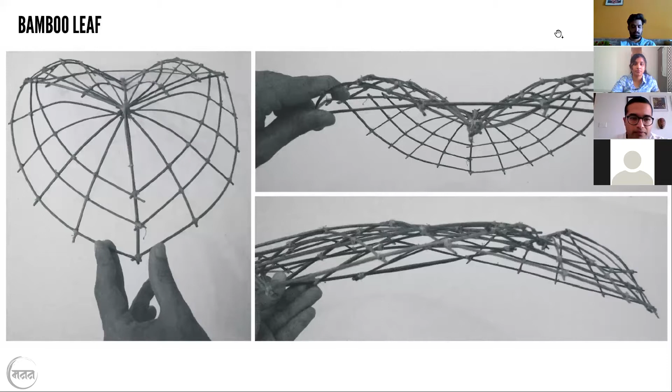And then the thought was about how one could use something like bamboo, which is a building material that is extremely sustainable, and reconstruct this leaf in the form of a freestanding pavilion-like space. We exhibited this at the Shanghai Expo, and it was part of a bamboo pavilion. So the idea was, how do you build a lightweight structure derived from nature, derived from the form of the leaf - and this was in China.

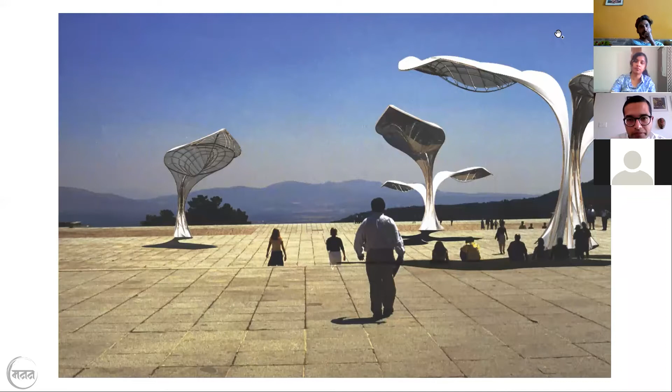So we showed how, in large public places, these could just be installed as very lightweight structures - it's just fabric and bamboo derived from the form of the leaf.

A couple of years after this, I was involved with the CIDCO Exhibition Center, and so one sees the learnings from that, in terms of structure and skin being not very different from each other.

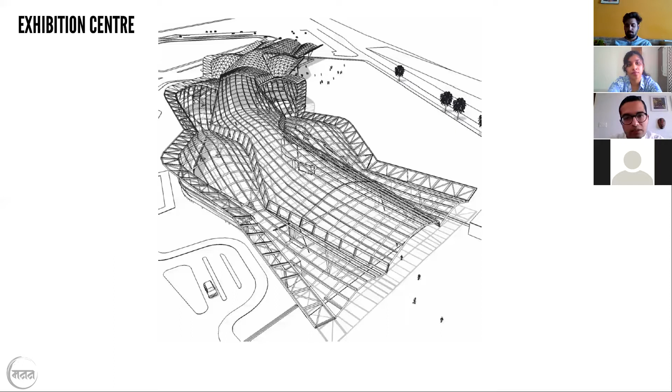In this building, this is a model of literally how the structure is. You will not see any trusses hanging below, you will not see anything below the skin of the roof. It's just one thing, and we could not have done this without that model that was done so many years back.

Which gave an insight into how structure might work. Of course, many of you must be familiar with the CIDCO Exhibition Center building, and so everything you see here is actually structural, including the inclined end truss, the arches, and even the skylights, in fact, are structural. It's an inclined truss which actually spans between these sets of columns.

So nature as a giver of form is an idea that we look at pursuing in various ways, seeing how nature is really an inexhaustible source of inspiration. I don't think we've even scratched the surface as far as architects to know how much is possible.

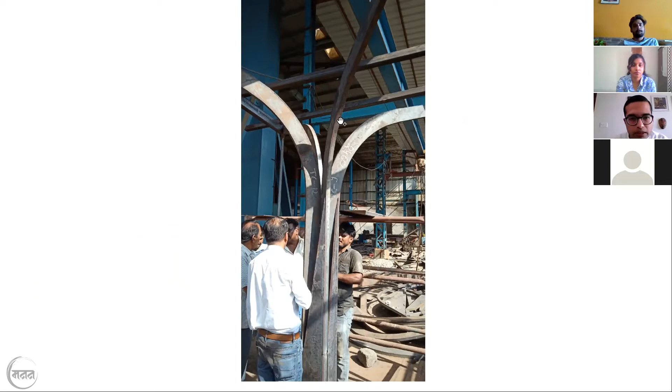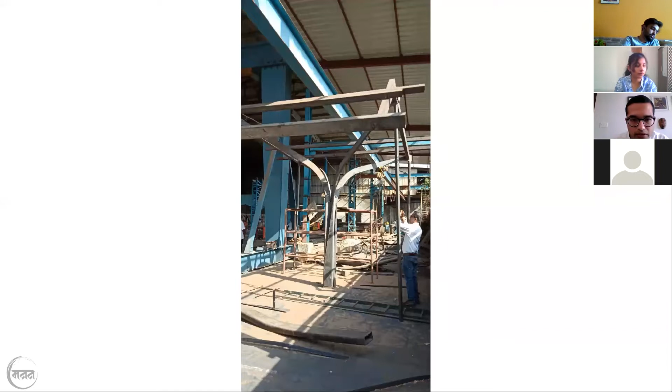So yeah, a full scale mock-up in the workshop, and then we brought it to site, and it was erected very fast on the site. So this is then finally how it looks, and the branch is holding up the roof, and here it is finally with some other trees around. The tree staircase stands and finds its place there.

Of course, there's more to the building — there's interior space, but I think that as far as this first theme of form from nature, the idea is that we can actually look at nature, understand and abstract those forms holistically, not just aesthetically, through structure, through all the possibilities that exist within that form.

Moving people and moving buildings. So this set of projects actually, for some people it may not seem like architecture, but it actually comes from the understanding that we as architects have of the city, and what we need to contribute in terms of understanding of the city.

This is a project called the Walkabike. So the bicycle is one of the best machines ever invented, and it's extremely efficient, extremely elegant. The bicycle works as part of the larger transportation systems that exist.

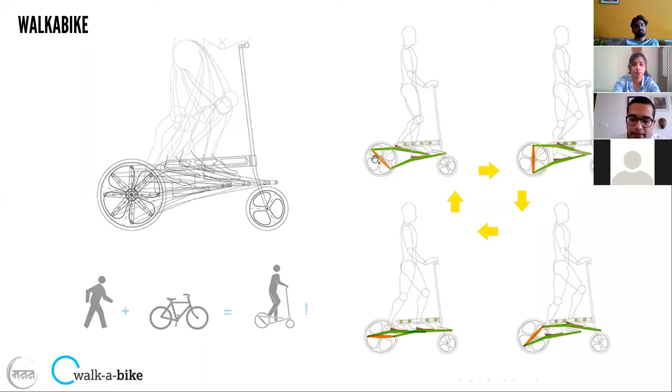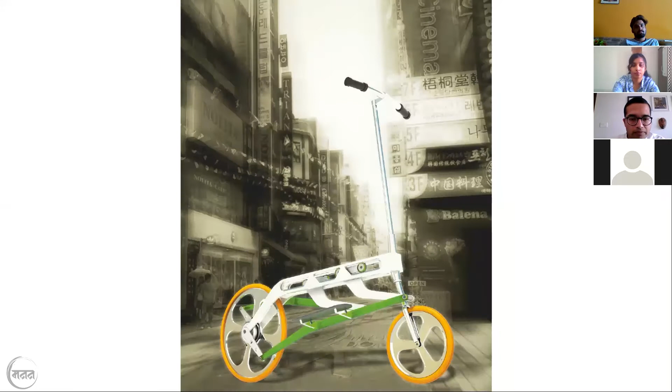Instead of sitting on a bicycle, you could walk. So we looked at elliptical motion rather than the circular motion of a bicycle. We call this the Walkabike, because you're literally walking, and it gives you mechanical advantage. This is finally how it was designed, how it would go across the city, and how it gets folded, with some details. These ideas came out of an understanding of the city and how, as architects, we need not remain confined to certain domains.

Building only means you don't just build buildings. There are so many more things that you can build, from moving people to moving buildings.

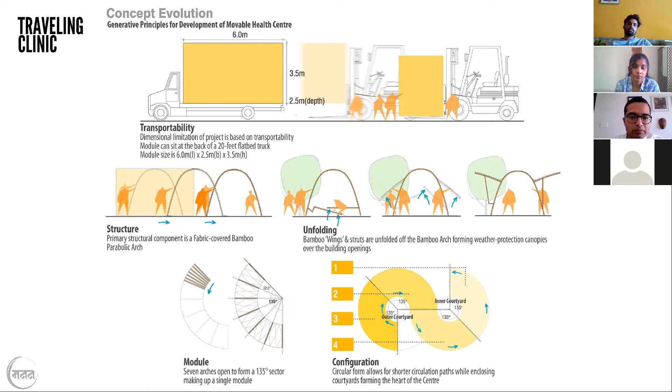This was a competition that we won, an international competition, for a traveling healthcare clinic. It was in Southeast Asia, and they wanted a clinic which you could pack up into the back of a truck and take away. The idea was using bamboo, the parabolic arch, and the stable frame, which could then be unfolded and assembled.

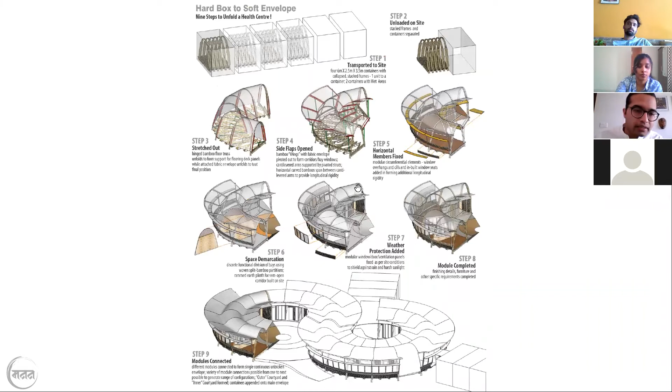So it comes in a box. You open the frames, you lay the frames out, and then you just open it up, literally unpacking a building. The use of bamboo, the use of fabric, the use of local material actually creates a clinic which would not be alien to a rural setting, but people would relate to it and feel part of it.

So there are actually two courtyards: one is the public courtyard, and one is the courtyard where the actual clinic would happen. So it actually wound its way around two courtyards.

We've been involved in a lot of smart city projects. You might have heard of the smart city urban renewal mission. We've done several cities, six cities at last count, where we've done plans for them. I just picked some projects out of them.

This is Kalyan railway station. One thing to understand is that the actual railway station and its premises are under the railways, whereas the precinct around the station is something the municipal corporation is involved with and is responsible for. So we were not on the station, we were outside the station.

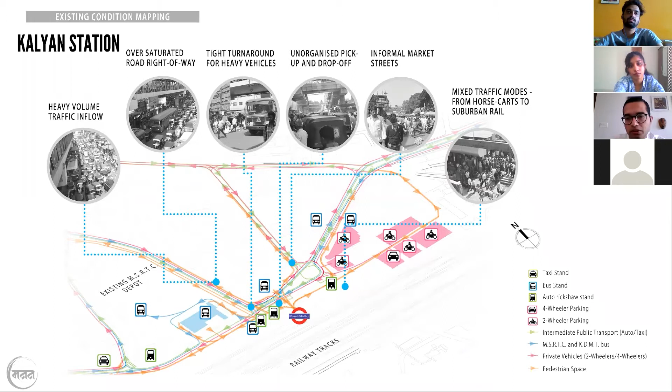So this started with the precinct. How do you develop a precinct around the railway station? We started by looking at mapping and understanding all the various movements, and like any railway station, you have multiple kinds of movements, multiple kinds of activities around.

After that, we said we need to segregate movement. Everyone cannot be managed at the same level - your autos, your taxis, Kalyan incidentally had tongas, and buses and private vehicles, two-wheelers, three-wheelers. So we created a multi-level deck, and we did something quite remarkable in this project: we made two government bodies talk to each other.

Usually government bodies never talk to each other. Kalyan Dombivli Municipal Corporation will never talk to the transport authority. We saw there was a bus depot here, and this was the largest patch of land available for anything - otherwise there's very little land. So we proposed that we'd elevate the existing bus depot, take it above, and use the base for parking and pedestrian amenities.

When you think of it, even though they're both government bodies, we weren't sure if they'd agree with each other. But this started off as an idea, we kept talking about it, and finally it's done. There's an MOU - memorandum of understanding - signed, where the bus depot will actually go up.

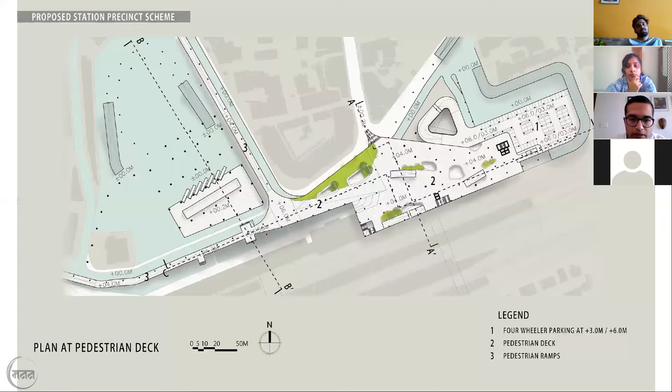So what we've ensured is that pedestrians move out at the same level. When you cross the bridge, you're moving across at the same level, creating much larger pedestrian-friendly areas around the station, putting the pedestrian and public transport first. These are some plans of the area, and this is the deck, which becomes the pedestrian deck. Usually areas like skywalks become very limited, because they're just conceived of as moving people from A to B.

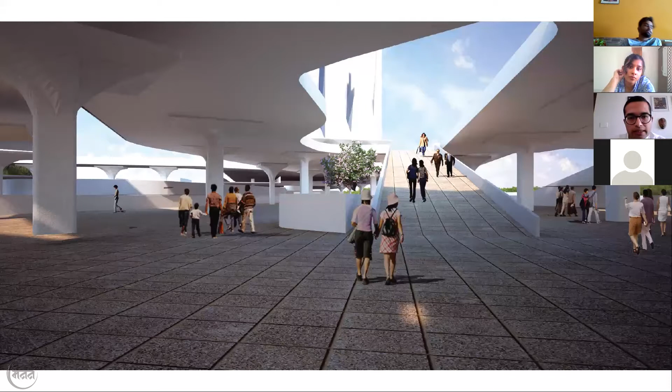At railway stations, there's so much more that has to be accommodated. So we looked at more generous decks, larger decks where hawking was allowed, where people are allowed to wait for auto rickshaws, and much more a sense of natural light coming down. They're not these dark, dingy spaces, but spaces where you're much more relaxed getting off a train.

This is actually under construction as a design build project, so all of these drawings go to the contractor, and they build based on those. This is a plot we opened up because we could optimize it, which the railways can build and sell to partially fund this project. We've also done Thane railway station.

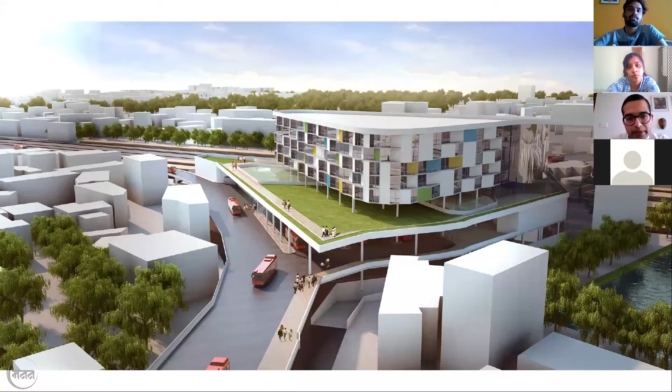In the interest of time, I won't go into this too much, but similar ideas of an elevated deck. This is Thane East. Thane West already has a station improvement scheme, looking at an elevated SATIS which comes in and segregates movement.

The third part is about the house. All architects love doing houses, and we are no different. The ideas about the house are that we look for houses that are not extravagant, not architecture for architecture's sake, but houses which actually engage with their context, which bring the context inside, and which connect to nature in a very simple, very primal manner.

This is called the Twin House, north of Bombay, and again a low budget house with a fixed budget we had to work within. It's a heavy rainfall area like all of Bombay, so we were looking at the sloping roof as an idea, doing it in RCC rather than in steel.

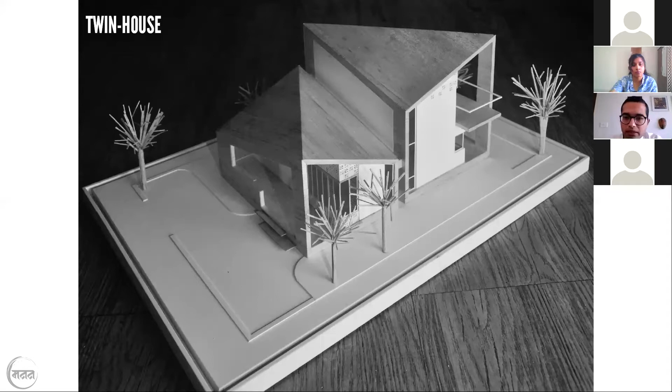So again, the idea that sometimes you reduce a concept to a very simple gesture - in this case, just that folded roof, and that was it. In fact, personally I think the walls are just incidental. The roof does everything.

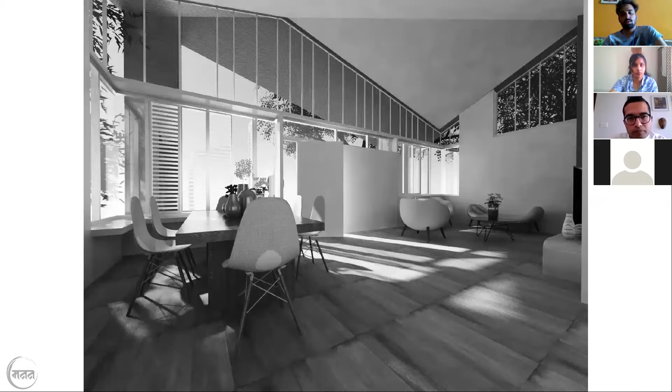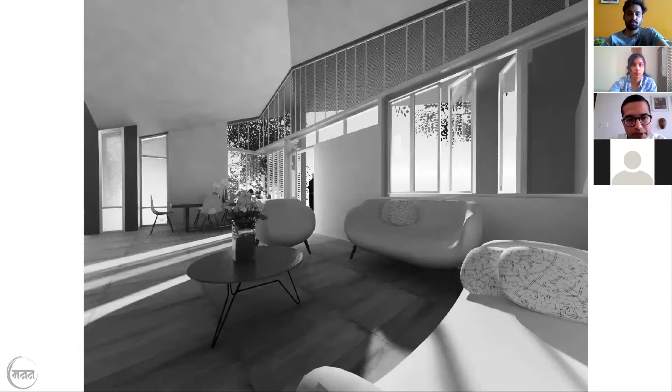It gives very open, very connected spaces which connect to the outside. Since none of this is structurally required, it's much lighter, and the house just opens up to the outside. This is actually part of a larger complex with many plots, and this was the first one which got built.

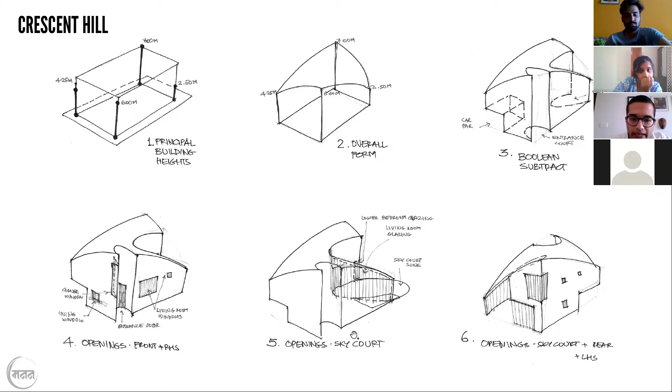The next 2 projects are in Bangalore, in a place called Nandi Hills, north of Bangalore. The project was called Crescent Hill, and here instead of the folded roof, we said let's bend the roof - one roof achieving different heights, but instead of a facet, it's just a sloping, curved roof. We picked 4 points and bent it across, so you had a greater height where you had a double story, then it stepped down, and we carved out areas for the entrance court on one side and the inner court on the other.

This is how it finally looks. Again, this is a form of house that keeps changing as you move across - the attitude towards the street, the attitude towards the courtyard - all of these change because of that gesture of the roof. It bends down towards the inner court, with a carved out court and stair which takes you to the bedroom above.

The next project is also in Nandi Hills, and both of these are larger developments. This is a module, and that house module repeats across the entire development. Some ideas related to the master plan address how, in a large development, you give everyone a sense of individuality and a sense of community.

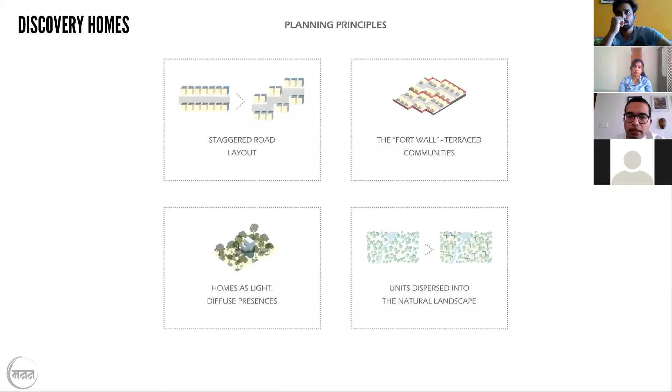Everyone goes to these hills and the first thing they say is, let us flatten it out, which is quite a ridiculous thing to do. So we actually looked at working along with the land, and that gave us our plan.

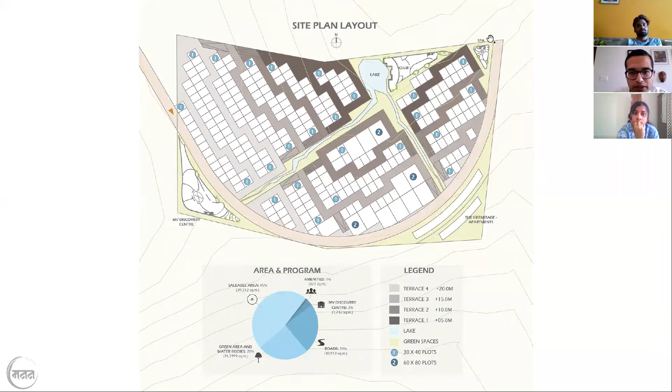We maintained the slopes and made the natural streams the main things around which the development is designed. All the streams are seasonal, and they collect into a small pond at the bottom, where we put the clubhouse and all the community facilities. The roads are staggered so that traffic moves slower, and the different shades of gray are actual terracing, stepping down from the upper level to the pond at the bottom.

Again, these are not very high budget houses, and they're modular. So we looked at very simple, light, and easy to build frames. The house becomes a fragmented, lighter, more delicate presence in the landscape, with its own sense of internal space and internal courtyards that the house looks onto. Within the module there were variations, so even though it's the same module, one house looks different from the other.

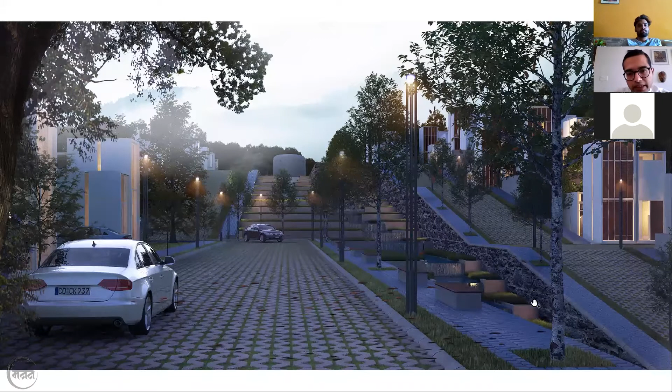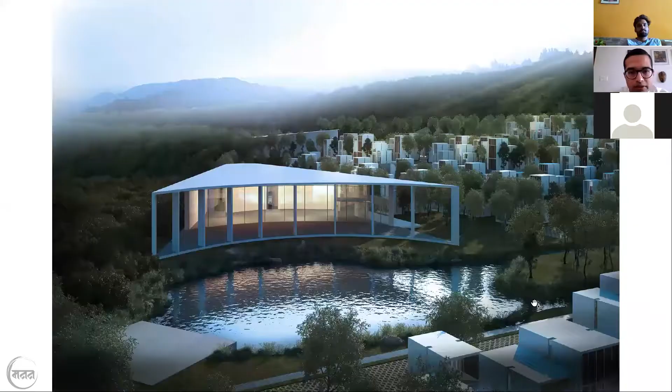The whole stepping down of the stream, which takes you all the way to the bottom, becomes the main feature that distinguishes this housing development and gives character to the space. Working along with the landscape and letting that dictate the kind of development we did was very important, and this is the lake at the bottom of the entire development.

From the individual house, we moved to collective living. This was a competition we won, which looked at how to have a house and a farm together. We took a module with 4 houses and let the roofs be green. Instead of one flat green roof, we created a terrain, almost like a man-made hill, becoming an interesting interconnected terrain where you could actually grow food on top.

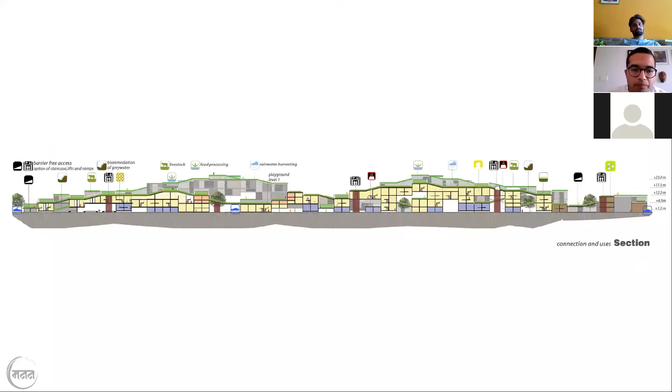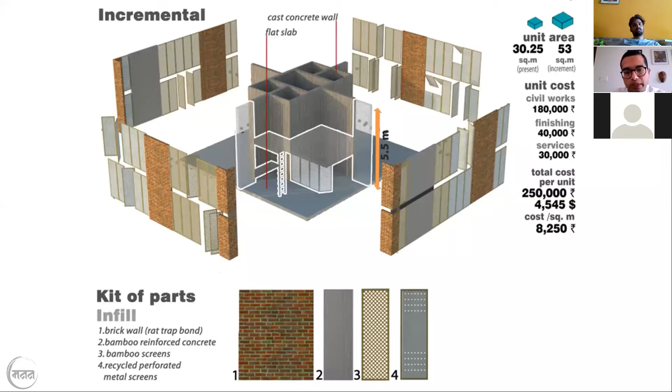This is, of course, an ideas competition, so we really had to push the ideas to their logical extreme—how does this entire roof get planted? We looked at the houses as just cores, like a different set, so you'd have the structure, and different skins could come in and finish the house. This is how it would look, with the whole undulating terrain on the roofscape, and a lot of light coming downstairs.

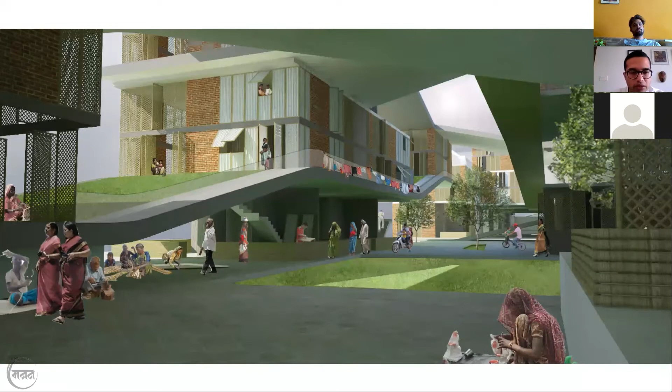Even though this competition wasn't intended for building, competitions do a couple of things. Within the office, they help build a lot of skill—people are able to work very fast and at high levels of quality. They also seed ideas which lead to other live projects in the market. The entire development looks almost like an undulating hill.

Another winning competition, this time in Mumbai, was by a builders' lobby group looking at rental housing. It was low cost, but low cost doesn't mean substandard. We looked at ways to get accessible green space for everyone in such a dense development. We split the building into 2, and midway we placed a garden, so no one is more than 4 or 5 stories away from walking down to a garden. The building was porous, so light and ventilation penetrate through.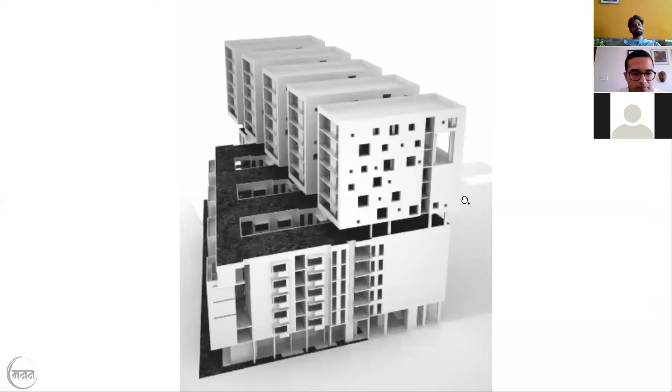This idea led us to a project in Bangalore, a large 12-acre development, which I'll quickly run through. We looked at each building designed according to orientation, considering climate. Circulation space—the movement space within the building—isn't just corridors and staircases, it's space where people come together, so that was given a lot of importance.

Angling, if you look at this drawing, means angling houses away from each other, so no one is staring across at a house opposite—instead they look away, giving a certain sense of privacy. Every house has at least 3 sides open, and everyone has a little bit of green, a little planter bed.

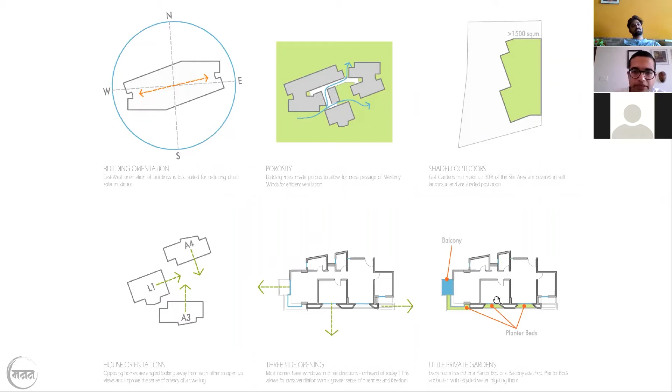This carries over from the rental housing competition, which is a second ground at an upper level that connects all these buildings together and becomes that connecting terrain and social space. This is the larger development where the entire green is open to the road, so it's not inside and enclosed, but much more open and public.

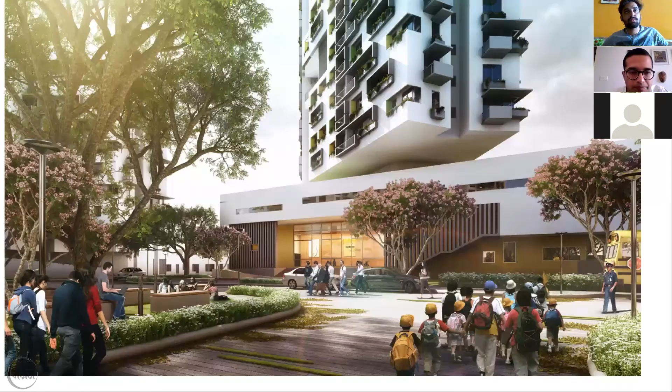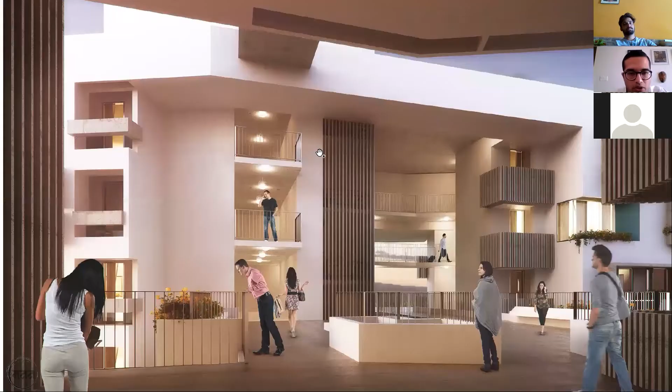This is currently under construction. A couple of other things: the alternate floors are staggered, so everyone doesn't have the same configuration. Everyone has a little bit of garden in the form of a planter bed. And this is the 4-story connecting bit that goes across and becomes this large connecting public space at an upper level.

You see the staircases, so that these become live active spaces and not just dead corridors or dead staircases. This staircase actually cantilevers out from here, with a little bench so you can sit down and look down onto this area. There's railings which are coming up.

These are the large verandas. So instead of looking at corridors, we looked at almost verandas where people can come out and look down onto the green below.

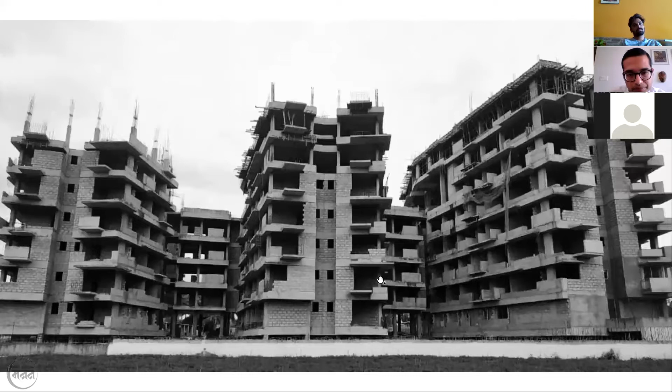This is the connecting 4th story. These are still to go up, and you see the alternating balconies. The planter beds are just getting done, and again the verandas looking down with the staircase on one side.

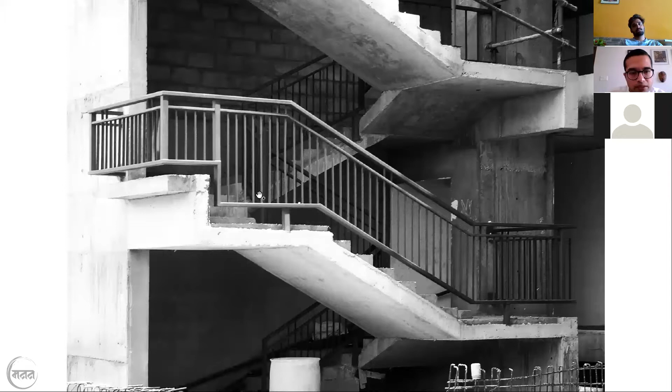Some details on how the staircase railing is supported here and here—it's almost like a beam which goes across this entire length. Balconies plus planter beds are integrated, so you can sit right here and have a planter bed right outside your window.

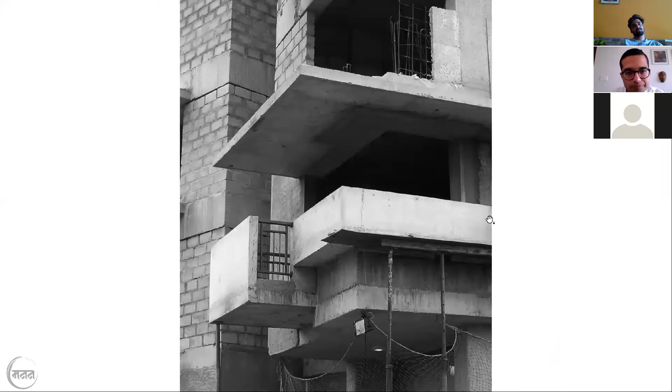So the next part is about the scale of ideas. Do ideas have scale? Is there something too big to be suited for ideas, or something too small? The next two projects will talk about that.

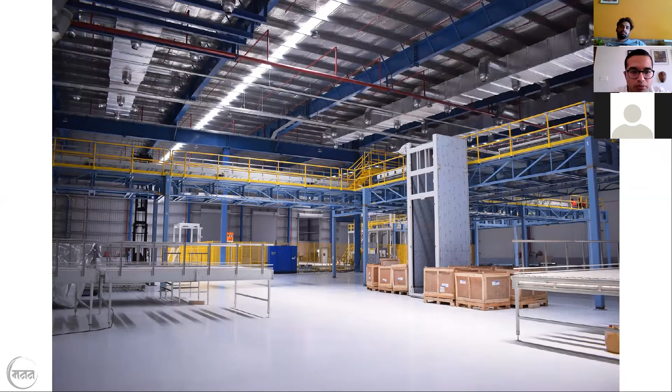So even in such projects—though to a much lesser degree, since these are highly process-driven—there is still room for an idea, room to push certain ideas. And this is the roof.

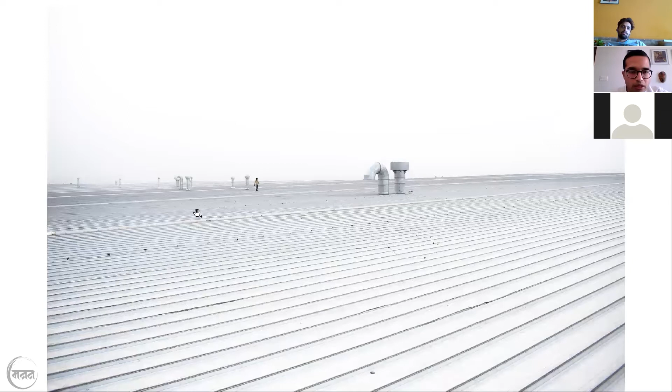This was for an engineering practice, the structural engineers. So we actually looked at ways in which the practice of a structural engineer, which involves understanding of structure and material, how can that be reflected in the space that they're working with?

It's a very small space, this is in Thane. We actually referenced a lot of structural concepts in this. It was a higher story height, so we didn't put any AC ducts across the space - we just kept the AC ducts at two ends, and the main studio space was blown up.

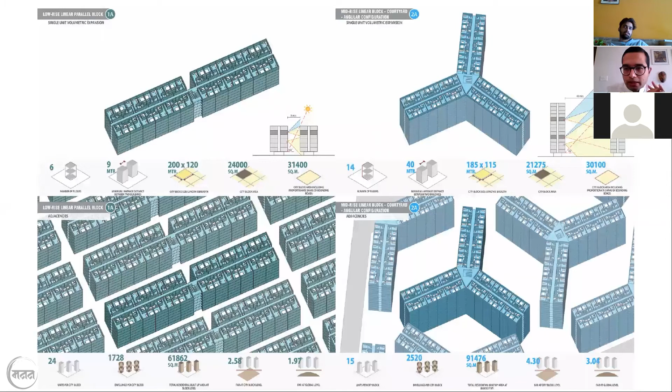So we just modeled various typologies of buildings, whether it's a linear typology, a triangular form, courtyard building typology, or point towers. The whole idea was to see - we have very random ways of deciding FSI at very global levels, it will just be decided, okay, a global FSI is 3 or FSI is 4. Do we know whether the buildings and the plots can actually support those kinds of densities in terms of just ensuring a reasonable quality of living environment?

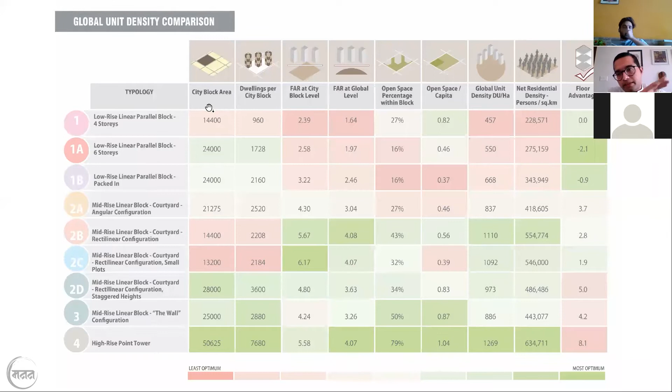We tested this across, and finally we did an evaluation of the various typologies - you see the typologies lined up here, and then the metrics. How do these metrics line up? Of course this is much more, I'm just going at a very high level over this, but this is one idea of building the idea of the city.

The other is looking at city centers. So we've been looking at city centers, and we looked at Bangalore as a city, and how one can reimagine the center of the city. So we went and pulled up old maps of the city and understood how the city really developed over time. Bangalore is India's fastest growing city, but it was never really designed, never really conceived of as a commercial center.

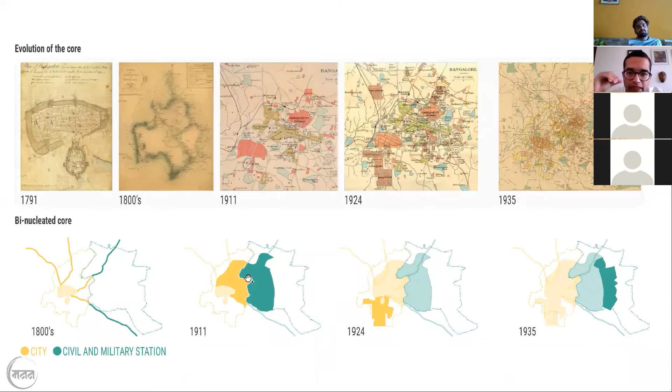It was a garrison town, and then became an administrative center. So we actually understood how the core of the city developed, and a lot of the issues we realized is because of that baggage, literally, of history—it was never really conceived of as a commercial center.

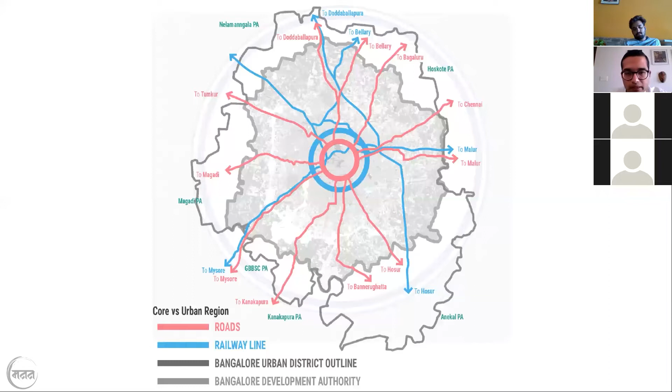So what you have today is all of these roads which just crisscross through the center of the city, and they're constantly struggling to build ring roads to bypass the main city. So we looked at how do you first define a city center?

We did a comparison across cities, and we said that Bangalore didn't have a defined center. If you just see the scale, what they define as a center is like 5 times the size of Manhattan. So we had to first decide what the center is.

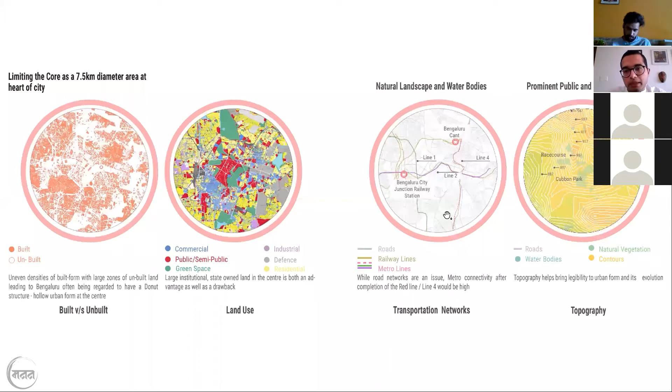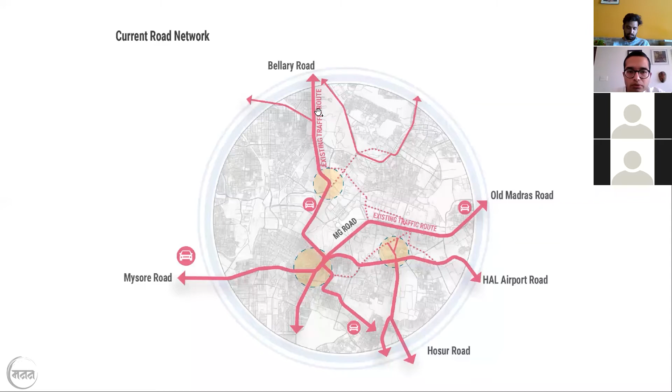Once we decided that, we did an extensive mapping exercise of land use, of built and unbuilt areas, the transportation upcoming and existing, understanding the landscape and topography, and then started making recommendations on how we could modify the road networks from what exists today to ensure there are bypasses.

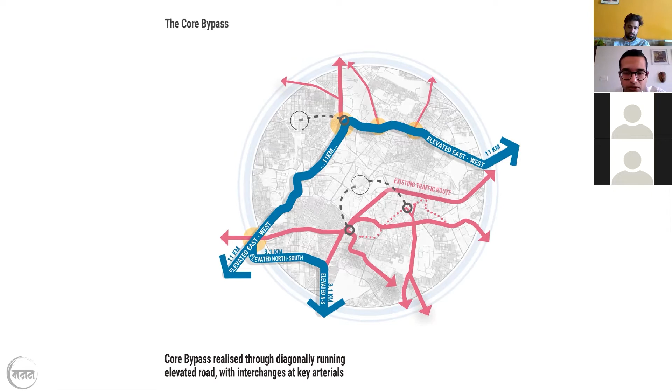The city center is largely pedestrian oriented—it's meant for people, not for vehicles crisscrossing. So key connections are either taken underground through the center or elevated on the periphery, which opens the entire core up to be centered around pedestrians.

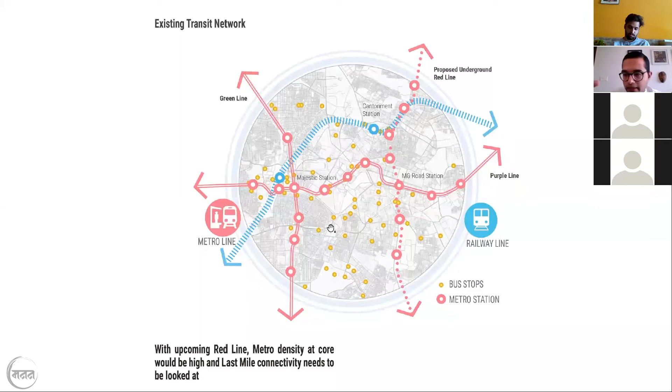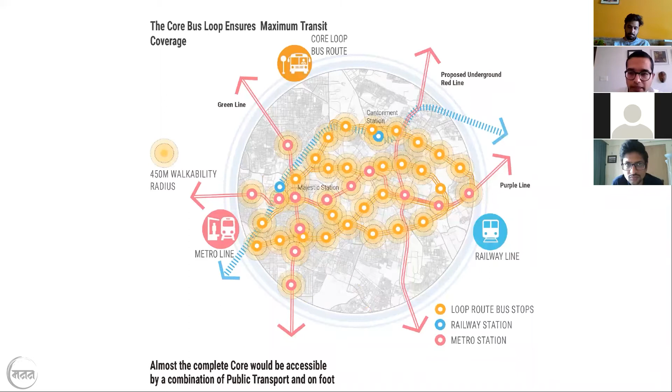We looked at existing metro lines and existing bus stops. What we proposed is that if you had a loop bus network, you'd actually cover most of the city on foot. That was another way to prove you could keep cars out of the center of the city.

And of course, Bangalore has a wonderful network of water bodies because it's at an elevation. So when the city was growing, there was a connected series of water tanks—one overflows onto the other—but that's being lost because everyone is building around them, and the interconnections between these water bodies is disappearing.

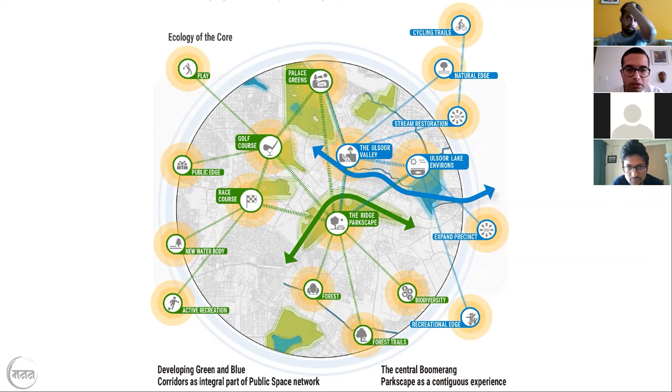So we looked at ways to interconnect the green, interconnect the blue, and then we cut up these districts and said, okay, now can we focus on districts and imagine the future of each of these districts.

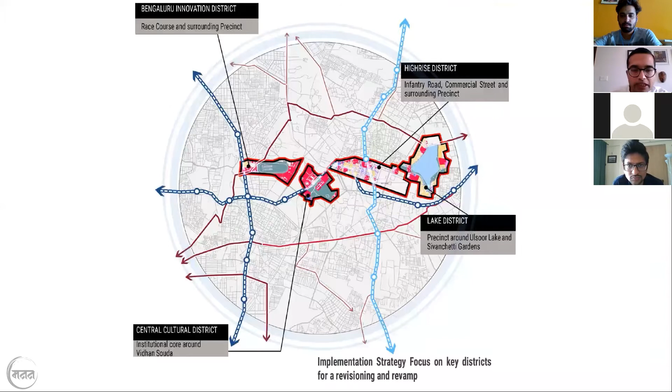So there's a lake district around Ulsoor Lake, and then we have the high-rise district—so it's not everything about just maintaining things the way they are. We looked at actually, because there's so much public transport, you can densify certain areas, and not for residential but for commercial.

And we said we have a large park in front, and this can actually go high rise—you can have a cluster redevelopment, like what we see in Bombay. And with certain norms, you can allow buildings to go higher here.

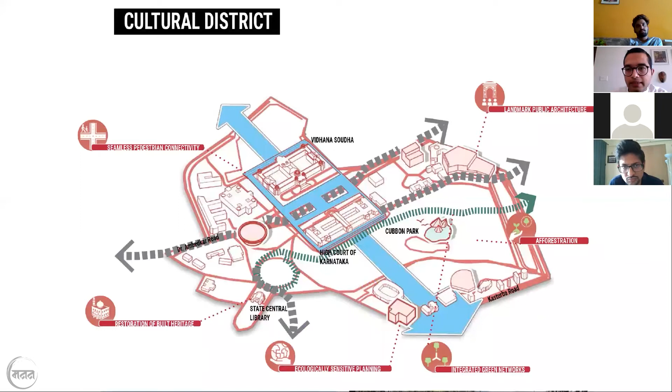Also, with existing buildings like the Vidhana Soudha, how do we build connections which aren't really there right now? They're implicit, but we looked at making them much more present in the cityscape and something someone can experience—and also bring in new districts.

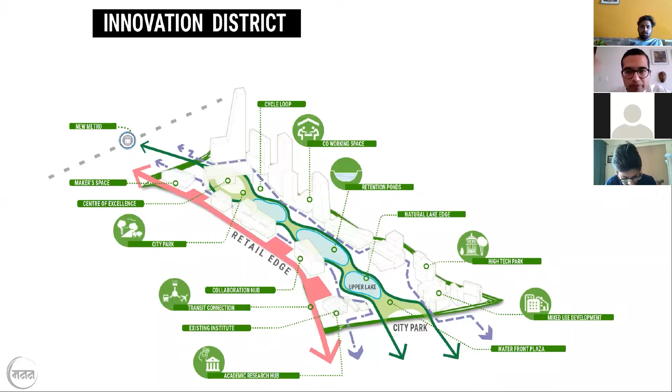So these are some ideas related to the city that we've done at the office. The way we see this is that we publish it, we talk about it, and push these ideas into the public sphere, and hopefully someone listens, and then these ideas move forward.

This is my last section for today.

One of our ideas about architecture is that architecture is not about restrictive space, about limiting what a space can do, but it's about enabling—about opening up possibilities for people to live, opening up much more possibilities within space, and therefore looking at space which does not have very restrictive, strict, hard boundaries, but much softer space.

This is a competition which we won, again an international competition. It was by a tile company—a very old German company that makes tiles. And they had a problem: they said everyone's coming up with these new materials, and everyone's forgotten something as basic as ceramic tiles.

How can we give new life to them? So we said, okay, ceramic tiles do two things: one is they're rigid, and second is they're static. So can we look at something which does the exact opposite, something which moves and is much more dynamic. We looked at a curtain, and how can we create a curtain with the sense of a curtain just using terracotta, glazed terracotta.

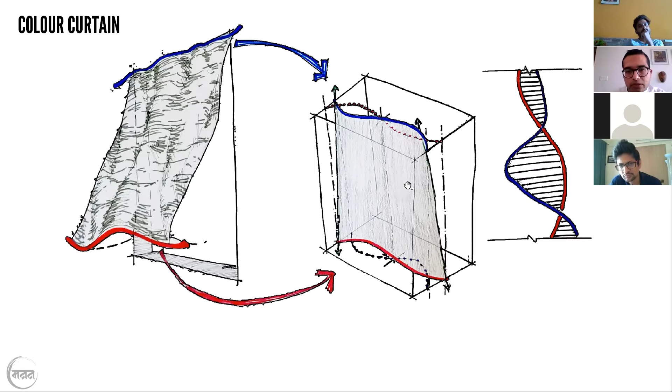And these are the initial concept drawings. Of course, like I've shown before, a lot of getting this to be built requires rigorous drawing, rigorous construction details in order to ensure that it's built.

So we looked at what are called baguettes - that's the technical term. These are long cylinders, and we painted each side. In the competition we said let's paint each side and make a curtain out of this, and you can spin each of these. When you spin it around, the color changes, so you'd have something like this, which would change to this, which could change to this. It's just a billowing kind of curtain which people can come and spin around.

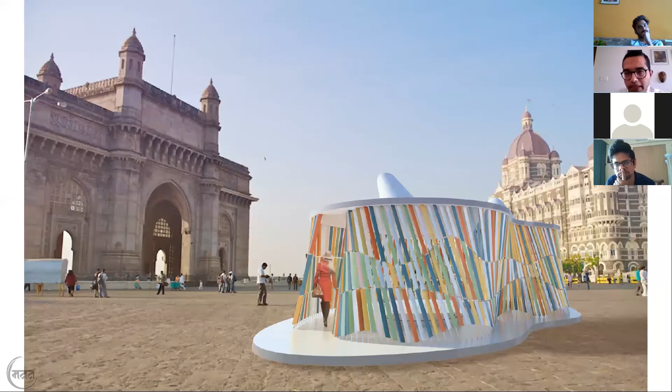And we said make a pavilion - it can be anywhere, it could be in Bombay, it could be in the Rann of Kutch. So we won the competition, and finally it was built in Germany. It didn't sit where we thought it would, but it's there. And they built it exactly the way that we conceived of it. This whole idea of taking a material which is so basic and giving new life to it is something that was interesting.

Right, I think this is our last project. Yeah, there's something there - this is a school for little girls, in Bombay. Like a lot of projects in Bombay, space is a constraint. This is hardly a 4,000 square foot plot.

And with schools, you're given a very high FSI - an FSI of 4. So how do you kind of have the values of a school, which is about connection to ground? The children need to play, and how do you do that when you don't have land, and you're in a very harsh environment? You're right on the road, and it's noisy and dusty.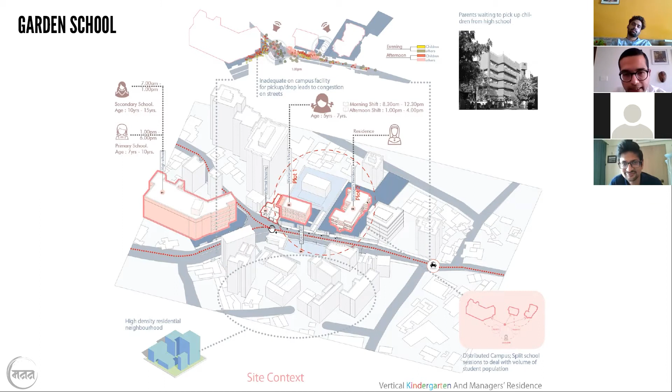So these are some concept diagrams. 460 square meter plot, FAR of 4. Once you leave your setbacks, it goes up to this high tower, and we had to give open space below. So we raised it up still, so it goes even higher.

So then sectionally, looking at the classrooms being at the lower level, the staff space in the center, and the public spaces at the top - so the children were closer to the ground. For the school for children, we just said it doesn't have to be this hard edge building - let it be softer, just soften the whole profile.

And this was then the big move, which is also actually interesting. The fire department says you need two means of escape. On a 4,000 square feet plot with setbacks, you need 2-meter staircases - you can't do 1.5-meter staircases, you need 2-meter wide staircases. How are we going to do 2 staircases 2 meters wide on this?

So what we said is we'll wrap a ramp. This is actually a ramp which wraps around the building and goes all the way to the 4th floor and connects. It's a very intuitive way - children can just run along this ramp either up or down. If they run up, they end up at the teacher's room, and if they run down, they end up at the play area. So no prizes for guessing which way they'll be happy to run.

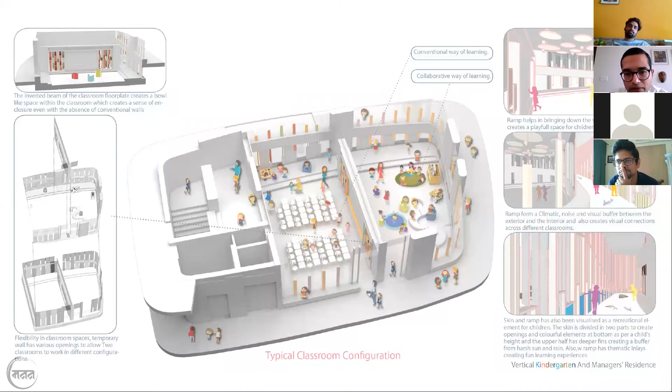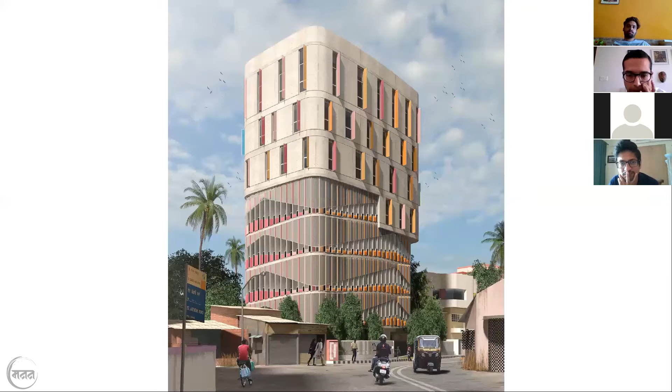The ramp becomes a way that children from other classrooms can look into the classroom. This is how the building will look - it's the lower level, and this is the ramp. It winds its way around.

The idea of color - you see echoes of the previous project, so this building looks different in color from one side, and completely different from the other, just in terms of what colors are used on the facade. It's for children. So this is the lower level.

This was the inverted beam I was talking about, so you don't see any beams from the underside. Everything is inverted - you have clean RCC soffits. And children are just happy to run across.

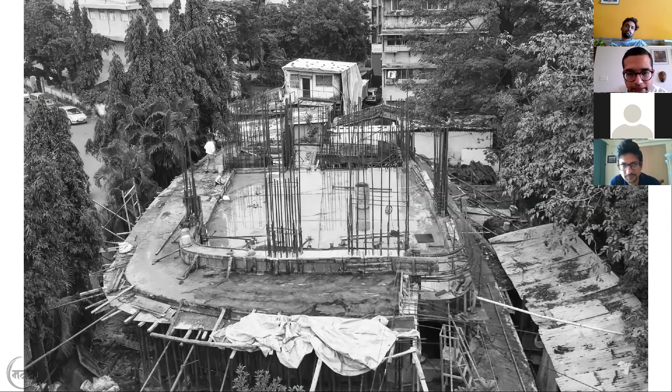We've now topped the first slab, going up as we speak. It's a bit of a challenge because our columns are elliptical in shape, which is very complex - usually you take your columns up to one level and then cast a slab, but each of these columns goes to different heights, so it's slightly more difficult to construct.

We actually got people saying they want to build this building as a challenge, so we've got some good contractors on board. I'm ending here, and I think there's a video that I'll share.

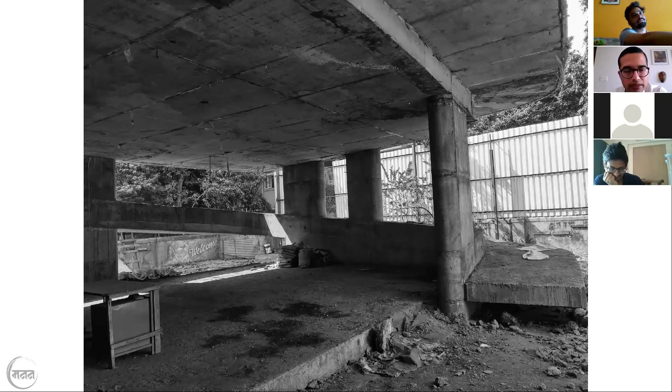There are a couple more projects, and I think these ideas run across projects. So I'm just going to show you a glimpse of other stuff we're doing - these projects run across. This is an art center in Seoul, Korea.

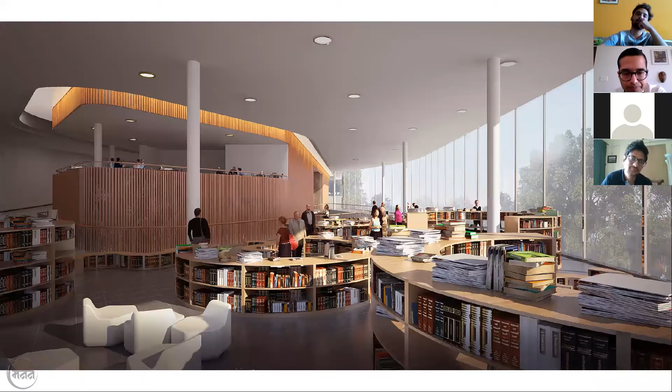I don't think I'll talk about these too much. A museum of language, also in Korea - it's in Incheon, in a private city, in the middle of a central park there. The idea of an open building in the center.

This is in Maharashtra - metal buildings sitting on a slope, these large cantilevers sitting very lightly and leaving these large, almost telescope-like forms looking onto the landscape.

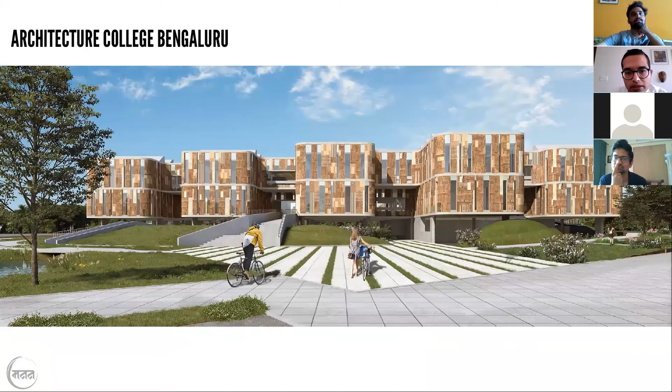This is a school in Prague, which sits at the top of a hill at the edge of the village in the forest, and an architecture college in Bengaluru. All of this is proposed to be donated - building material suppliers just donate material, and we create a collage of it on the facade.

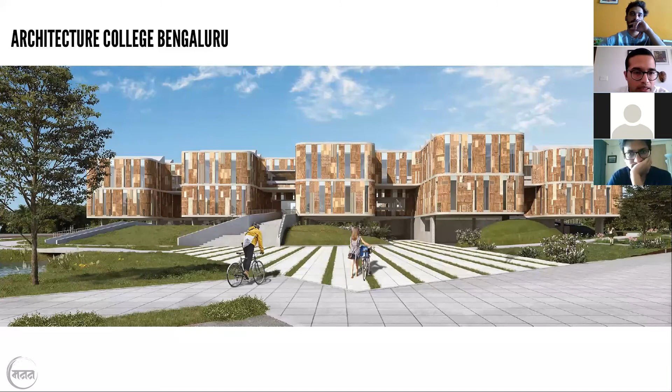I'm going to end with a video for one of our projects, and then I am done.

Can you guys see my screen? Yes, sir. All right.

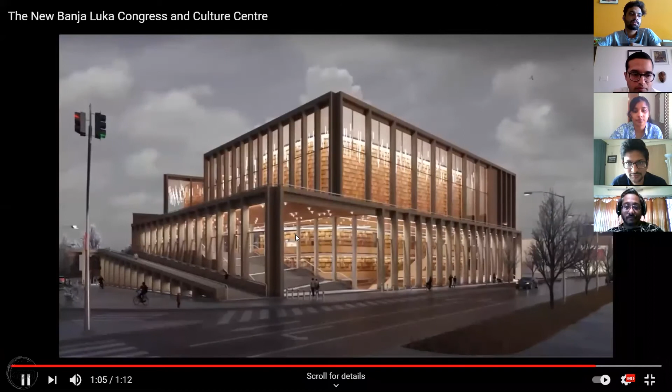Right, so I'll just end with this. Thank you, sir. That was wonderful, right, just a minute.